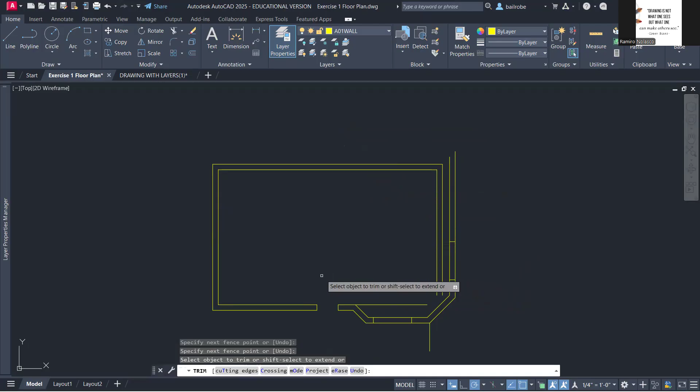But notice that this line is a continuous line, right? So maybe I'll just trim this so it doesn't offset twice. I'm going to delete that. And likewise here, I'd like to trim this because this is not the actual location of the wall.

That has been offset. I'm going to rely on this wall right here. In fact, I'm going to delete that. I'm just creating half, so I don't also need this. That was done, or there was an offset because of the continuous line made by the rectangle.

So now that I have trimmed those, I do know that this is the endpoint of my exterior wall, that's this corner right here. Even if I deleted the line, I still have that point right there, so I'm still good with that endpoint.

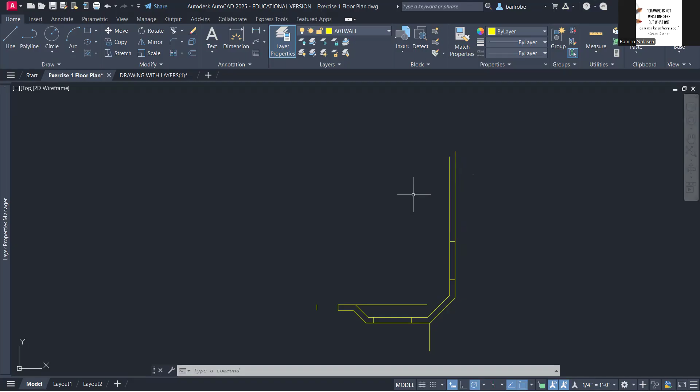Okay, next I'm going to do an offset, 13 feet and 3/4. So how do I do 3/4? Let's try this, 3-4. So I don't have a whole number. Can I just place 3/4? Yep, it did accept it. So that's 13 feet 3/4.

So I'm going to offset that. And then the interior wall thickness, where can we find it? Right there. 4.5, so that will be typical, 4.5, similar to the 10.5 for the exterior wall. So 4.5 will be the thickness of our interior wall.

So I'm just going to hit space bar again. Again, the first space bar is to end the offset command, the second space bar is to restart the last command, the last command being offset. So it just repeats or restarts the offset command. 4 inches, and dash to separate the whole number from the fraction, so 1/2 - I don't have to place the quote mark. Okay, so I'm just going to offset this like so.

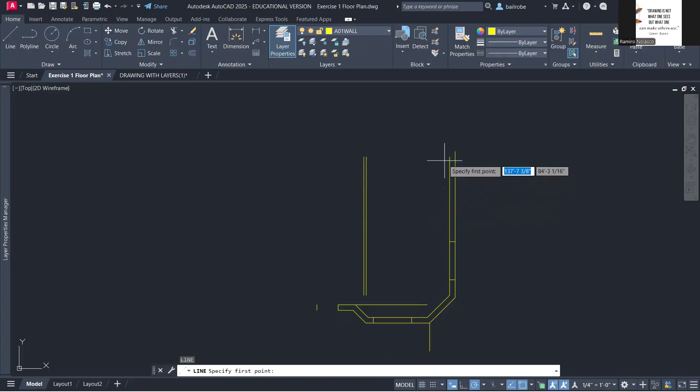And then I'm going to create a line right here, that will be the exterior wall. I don't know how far it will be, so I'm just going to draw one line right there. I can offset that, but I'll just draw another line, so that will be my new exterior wall. The reason I deleted that is because it was connected to this line and it would make an offset that I'd need to erase anyway, so no need for that.

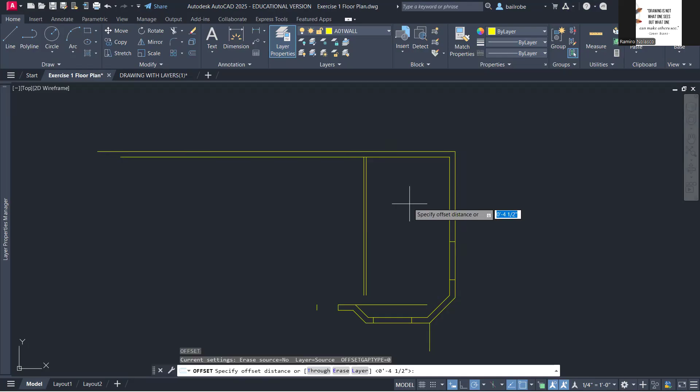Next, I'm going to offset this by 5 feet 6 inches. Okay, so offset by 5 feet 6, that's actually enough. Enter, and here you go. Now, should I do the 4.5 again? Really not, right?

I don't have to, because like I said, all I need is to make half. By doing that, I'm actually just doing half of this building.

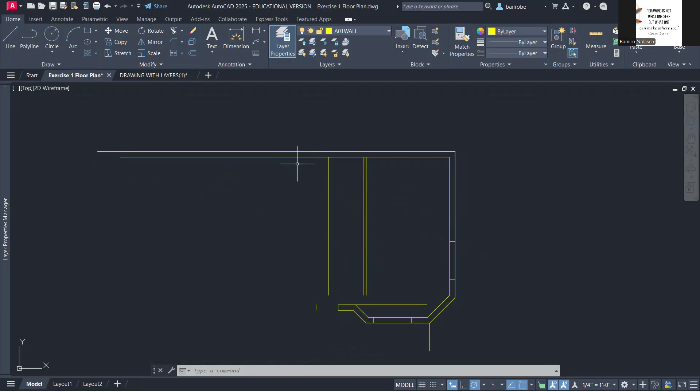So next, what do I do next? I'm going to do the distance from the interior side of this wall down, and that is 6 feet 6 inches. So from here down, that's 6 feet 6 inches. Let me do that. Offset by 6 feet 6.

Again, I do not have to place the 4 inches. So 6 feet 6 inches going down, and then offset this by 4.5. Space bar, 4-1/2, Enter.

Okay, so I'd like to clean it up a little bit, by using my friend, the trim command. So I'm just going to trim this. And then I don't want to trim this yet, so I can do that next.

And then here, for the opening of the door, we don't really know how far this is, right? So in that case, I can provide a distance. If it's not given, you can measure it from your door—how far is the door from the wall perpendicular to it? I would say about 2 inches is enough, maybe 3.

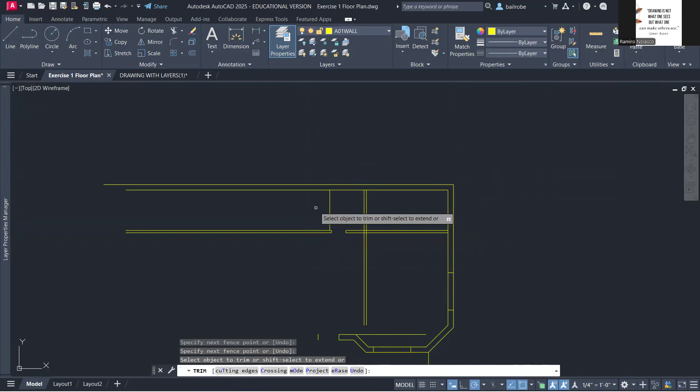So this is again, like I said, half. So I can trim this—I don't need that.

And do I do a mirror now? Not yet. Sometimes you're itching to complete the drawing, but it's best to have a strategy: complete the door first, the windows, and then the things that are symmetrical. So we have this line—if I mirror this, it will provide that line. I have this line right here—if I mirror that, I'll have that line.

But if I place the door and the windows, when I issue the mirror command, it will actually create these two windows immediately. So why mirror it now? Work on the window and doors first—that's what we're going to do next. So we're here, I can do the wall here, but I'm more interested in doing the windows first.

Okay, so I'm going to trim this, trim that, to show me the openings for the window. And for the window, hit escape to cancel that trim command.

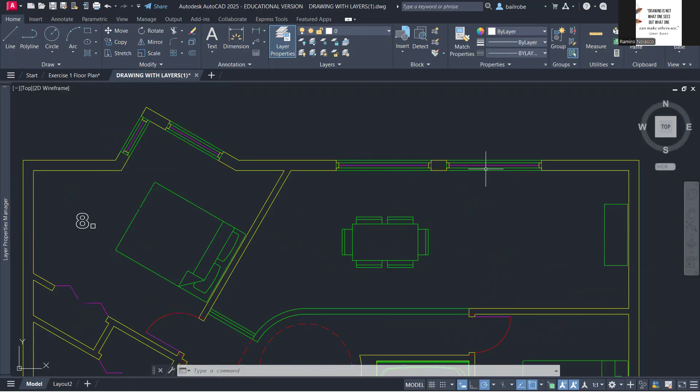I can open the drawing with layers. This is actually an imperial drawing, right? So this is an imperial drawing. I can recycle—whatever you have from your previous classes or previous drawings, you can use.

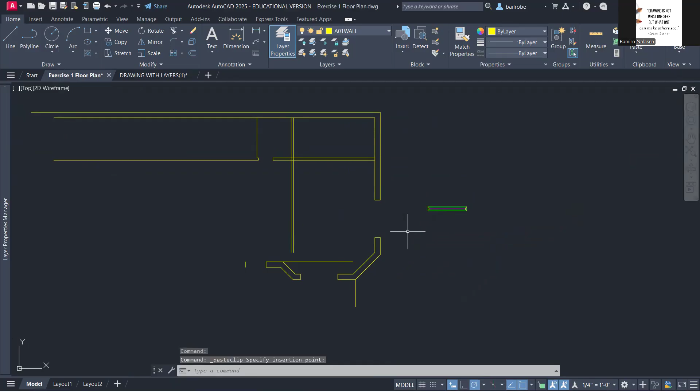So I can copy this, Control C, select and copy, and I can bring that in here. So bring that in here, and the opening is at 6 feet. So I need to...

resize this. Now if you have a block, the size of which is—let's say, let's look at the size of this wall. So this wall is only 8 inches. Ours is 10 and a half. So we're missing an inch and a half, 2 inches and a half.

So we have to resolve that. Likewise, this here is 6 feet 2 inches, so we're over by 2 inches. Okay, so we have to resolve that as well.

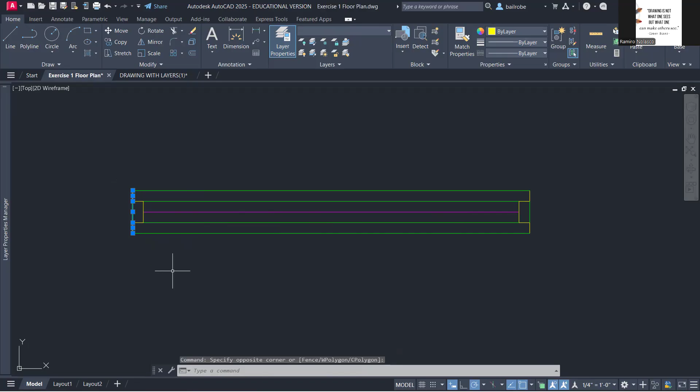No problem, so all we need to do is, number one, I'd like to clean this up. So I'd like to delete these lines—erase or hit the delete key. The reason is I already have a line there, and that belongs to the wall. Whichever is thicker, that line should be the one you use. So this one is the wall line—that's where the window will be placed. So I'm just going to use that.

Likewise, okay, I can delete this as well. Okay, so we're good so far in terms of the lines at both ends. Next, I'm going to use a line—I'll create a line and offset that by 6 feet.

Okay, so 6 feet is somewhere here, right? That means I'm over by 2 inches. So I'm going to make this shorter by using the stretch command.

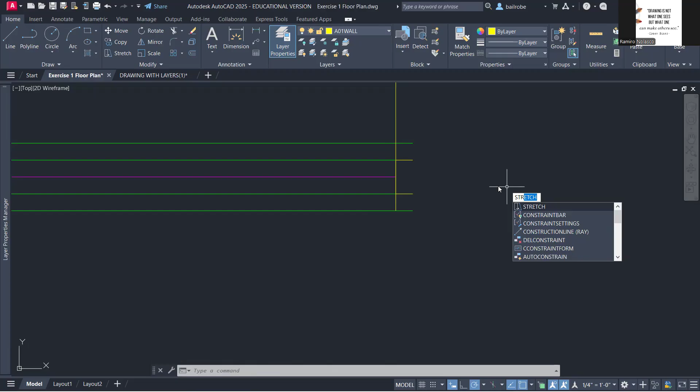The way the stretch command works is you create a window, a crossing window. So you should see the green. Anything that it crosses, it will stretch.

So I'm going to click here and stretch it from here to here. Notice that it is also stretching the line that we created, but that's okay. I can stretch it to here. That point is still present and I can simply delete this.

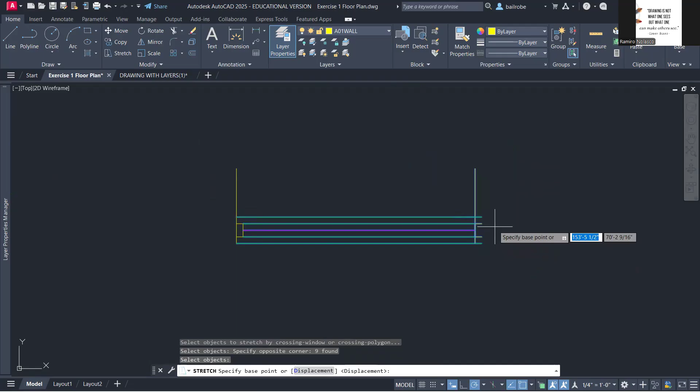Now one way of doing it is let's undo the stretch. I can stretch including this line, so that it will be within the green box. Because it is within the green box, it will simply move. I still have that intersection, so I can click there and then delete these 2 lines.

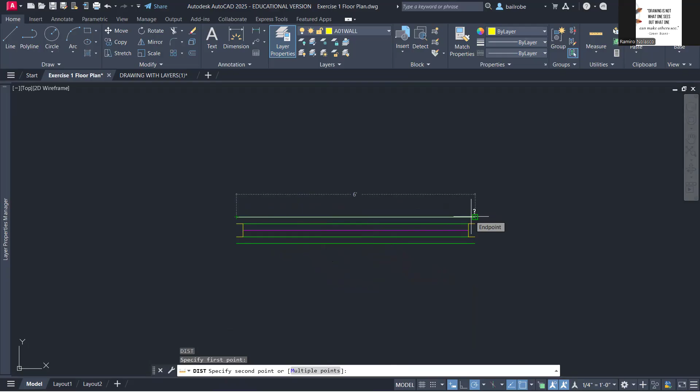You always want to verify at the beginning. This should now be 6 feet, so perfect. Now, I don't have the lines here, but that's okay.

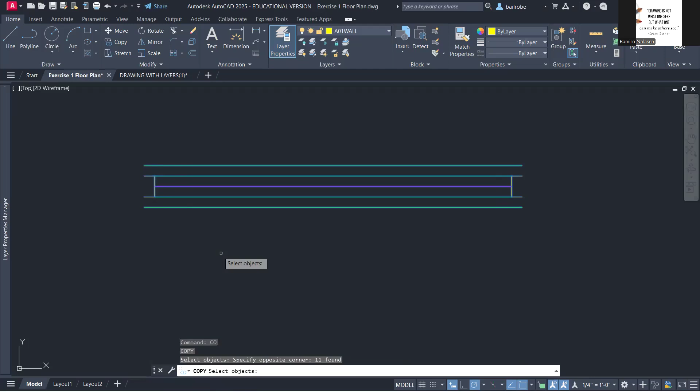I do need this to be rotated. So what I can do is copy this and rotate. Copy first, copy this from here to maybe here, just beside that, then rotate all of this here to 90 degrees. Okay, next.

Next, I want this to be placed from the midpoint of this. There's no line there, from the midpoint to the midpoint of this line right here. So what I'm going to do is I'm going to say...

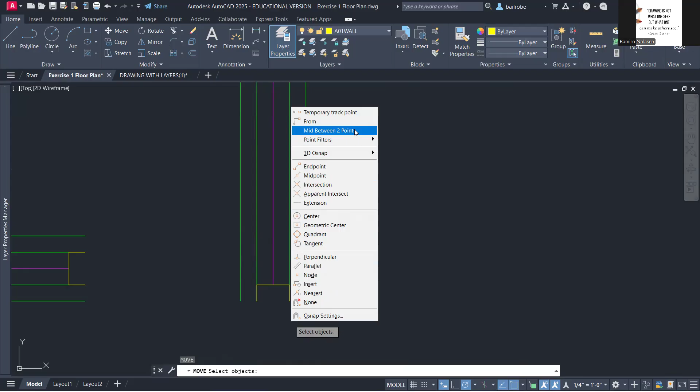Move, move, and then shift right-click, mid between 2 points. So I want the base point of my move to be the middle of the two points, mid between 2 points. So first mid, I think I'm still in select object.

Let's do that again. Move. Okay, let me move this and then enter. Okay, now that I'm in, it's asking for the base point.

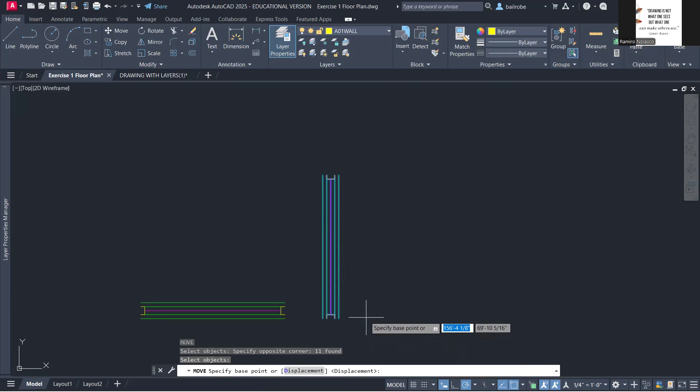I'll do a shift, right-click, mid between 2 points. The 2 points that I want will be this endpoint here and that endpoint there. That gives me the middle of those 2 points as my base point. And then I'm going to move it here at the base point.

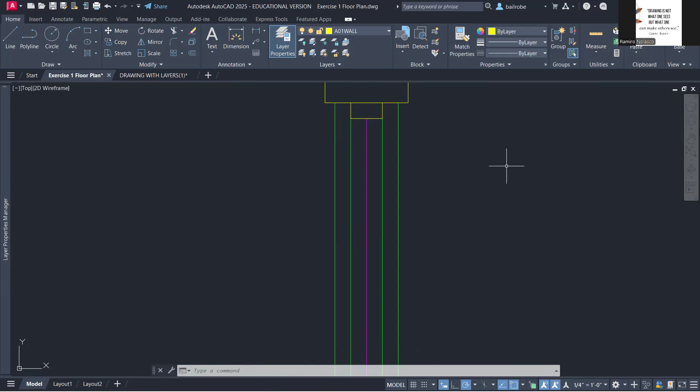There you go. Now, I could leave it like that, 8 inches, or I can also move this to the end, depends on the design. I'm happy with that, but if we simply move this, that might be similar to how our drawing looks like.

So all I need to do is move those two. Now I can move this to here, but which is easier, to copy and then rotate this and move, so you don't have to do the move, or simply move this and then move the green lines.

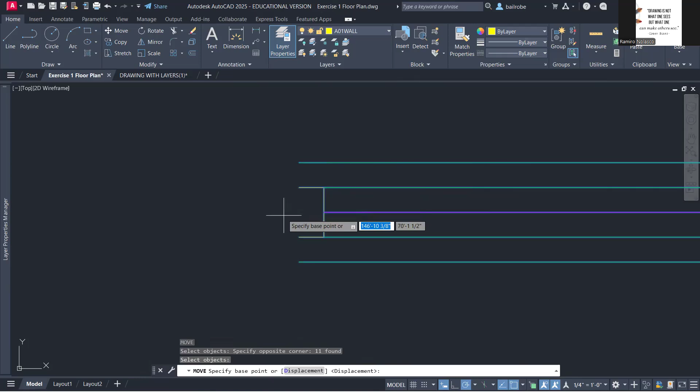I think that's easier, so I'm just going to move this. Again, decide which one is easier. Base point, again, shift, right-click, select mid between 2 points, select those 2 points.

It attaches to the middle of those 2 points, and then mid of this line. Notice if I'm going to redo all of this here, it will take you a while. So simply complete as much as you can, and then you can mirror.

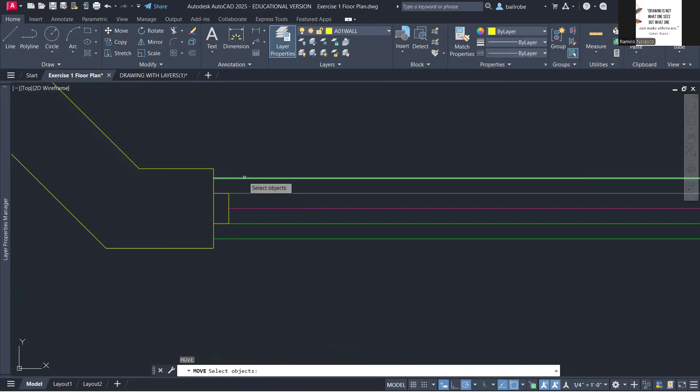So hold your horses and complete this one side first. Okay, so move, space bar, and move. Okay.

Next, I want to do the door. And if I go here, is there a door I can copy? Well, they do have a door right here. It's a simple door, but I guess I can just simply make the door from scratch.

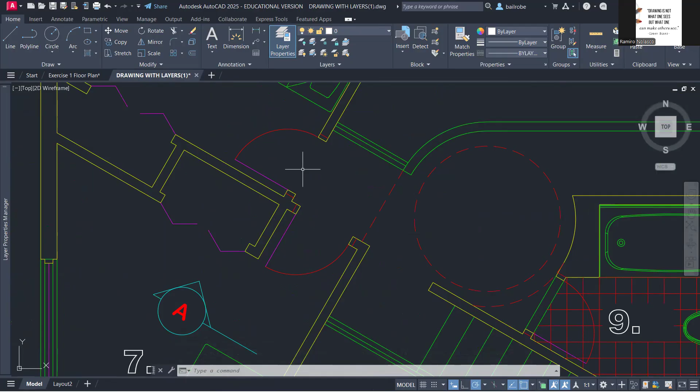I can copy that, but these doors are, well, I can rotate them. I guess, what's the distance? This is 2 feet 4 inches. Our door is 3 feet 4 inches, but we can use this door for the interior. It's the same, so let's reuse this.

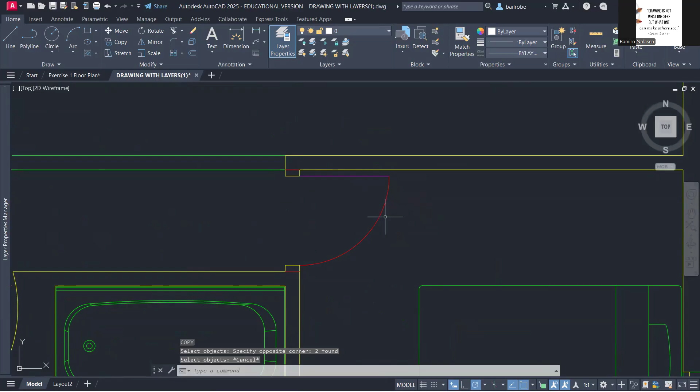Okay, so copy. Select first and then copy. Control C and then put it here. Control V. Okay, there you go. So I can use this.

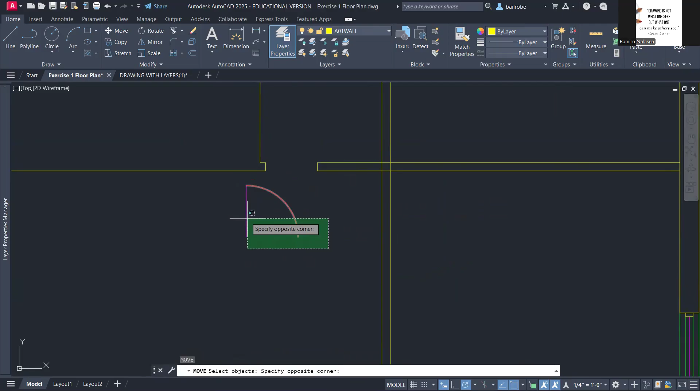Rotate this like so, and then move this from here to there. Okay. Now, in our drawing, it gives us a double door.

I actually don't like double doors like that, double lines showing the panel. Line thickness, like magenta, is good. And then this one here is red, so it's lighter.

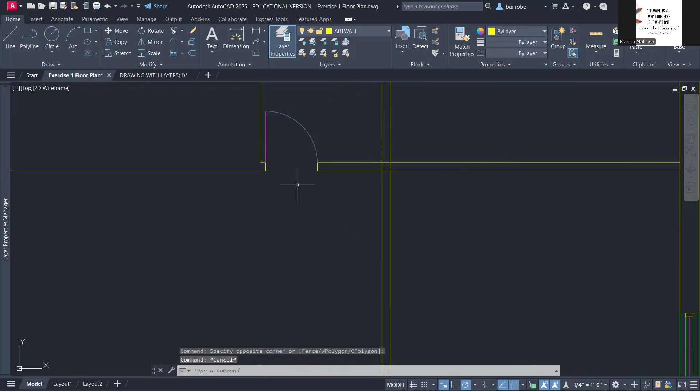But in most cases, I actually prefer this to be gray, much thinner. So red or gray should be good. Magenta for the door is also okay.

So can we use that here? Well, that's 3 feet, so maybe not. So I'm just going to go to the door layer and...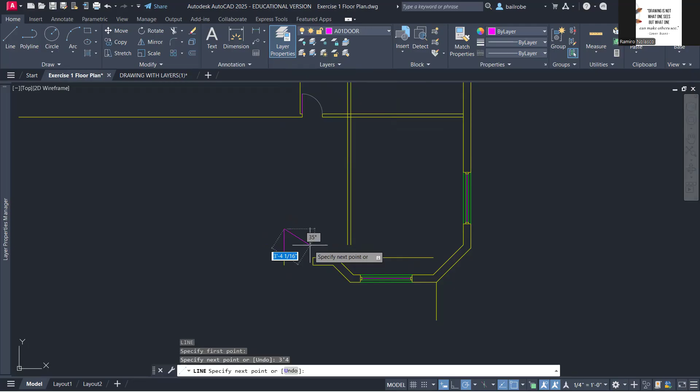create a line that is 3 feet 4 inches long. Okay, there you go. So it's a bigger door.

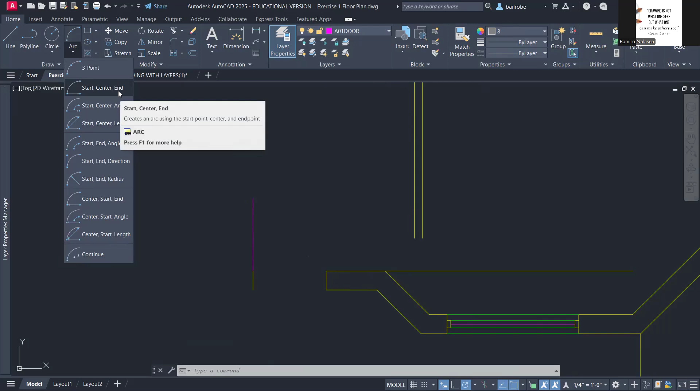Next, I'm going to draw the arc, and I'm going to change this to gray. It's still in the door layer, and I'm going to use this here, the start, center, end. Now, arcs go counterclockwise, okay, so that's the case.

It's asking for the start point, so counterclockwise is going this way. I'll click this as my start point. Okay, this as my center. And there you go, see, it goes counterclockwise.

So if you go this way, it still goes counterclockwise. Make sure you don't click this as your start, otherwise your arc will go this way.

You can also create a circle with the radius of 3 feet 4 inches, and then do a trim. But this is how you do the arc command. Okay, so end that there.

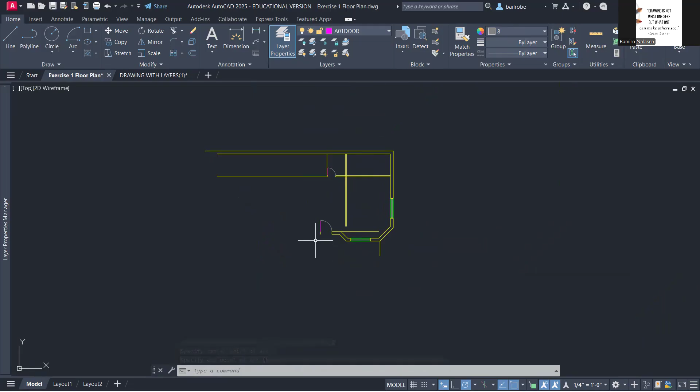Okay, so next, do I trim this? I think I should. I'm going to trim this, and I'll trim this as well to clean it up a little bit. So trim that, I don't need that. And then this one here, I can trim up to here. Okay, and then I can erase this. No, I think I need that. That's okay, maybe that's all I need to do right now.

So, am I ready to mirror now? Yes, I am, right? So I'm ready to mirror.

Should I trim this? Nope. Or maybe yes, yeah, maybe just trim that. I could have maintained that, but that's okay.

And then I use the mirror command. MI is the shortcut for mirror, so you can find that here under the home tab. You'll see there, mirror, right? But like I said, it's always faster to use your shortcut key. So MI,

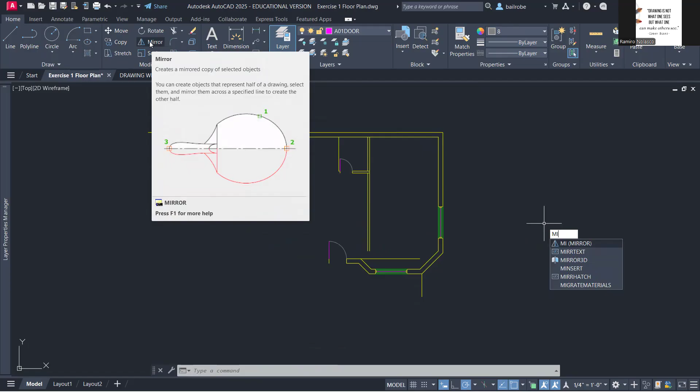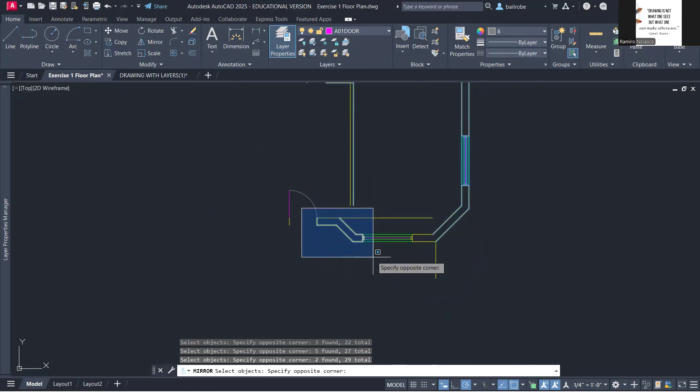Enter. And then what do I need to mirror? I need to mirror this, not those two lines. I need to mirror this. Okay, likewise, mirror this, maybe this. Okay, I don't need to mirror this. And then here, I need to mirror this. I don't need to mirror that. Actually, I don't need to mirror this, but I need to mirror this now.

Now, so if I mirror this, there'll be a duplicate. Okay, but that's okay, I'll do that.

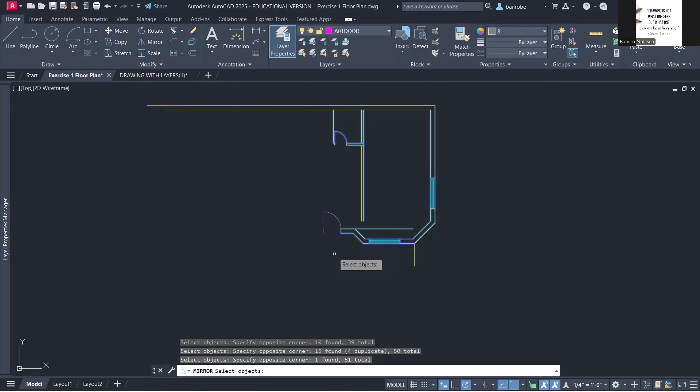Now, where will my mirror line be? My mirror line is at the middle of this door. Okay, so enter, shift right click, mid between 2 points. There you go, so that's my mirror line. And there you go.

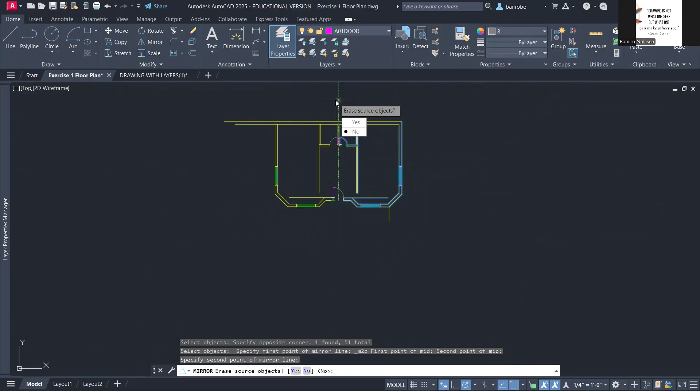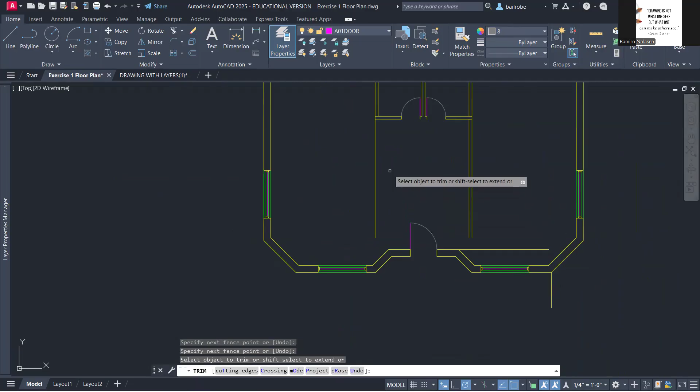Almost done with the windows and the door at the washroom. So erase source object, no. And then I can clean this up. Trim, trim that, trim this. Okay, and then I can erase this, I don't need that. And erase this, I don't need that.

And then enter or space bar. I do know that there's a duplicate here because I selected it, so I can delete the one duplicate. Always delete the duplicate, or you can also issue the overkill command. Overkill deletes overlapping lines, okay, so you can also do that.

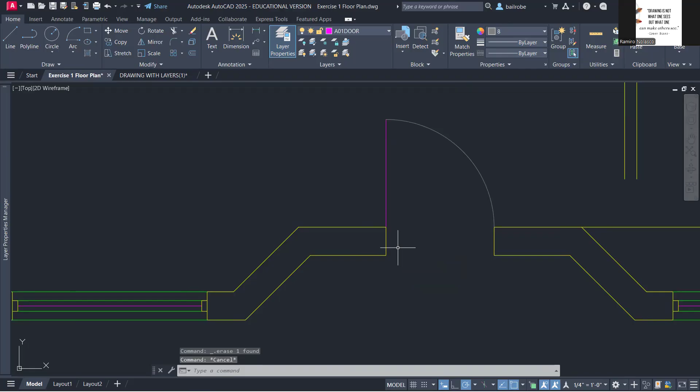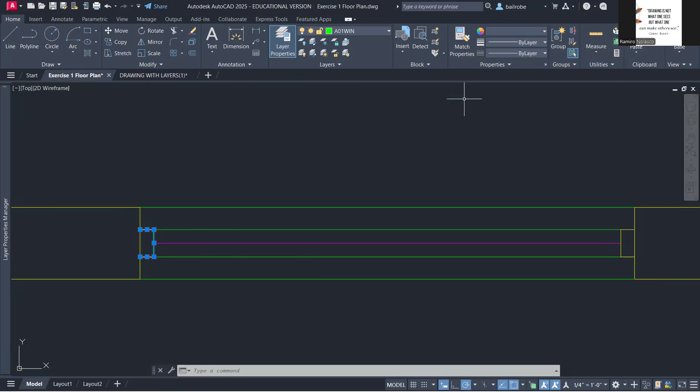So keep track of your lines. And again, by the way, windows, these are the colors, right? Green, so you had the frame at the bottom, that's green. This frame here, actually, I prefer this to be magenta. So this belongs to the window layer, A01 win. I don't know why it's not in the A01 win. So this one belongs to the A01 win layer, and it should be magenta.

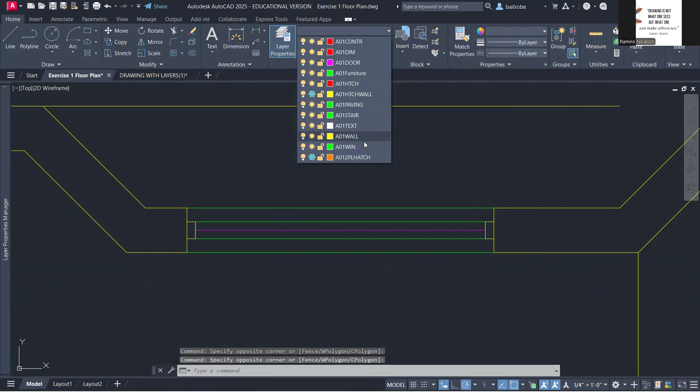I think the wall should have a thicker line. I made the mistake of not doing that earlier, so I have to pay for that by doing it manually. So again, this should be in the window layer, color magenta. Okay, so my mistake, but that's okay. See how much time I am spending because of that mistake. So efficiency, okay, this should belong to the window layer, and the color is magenta.

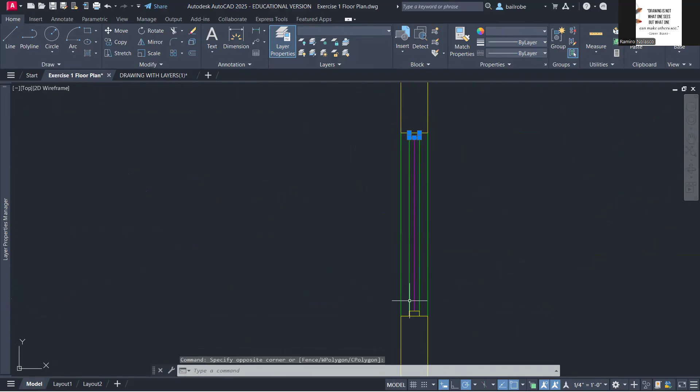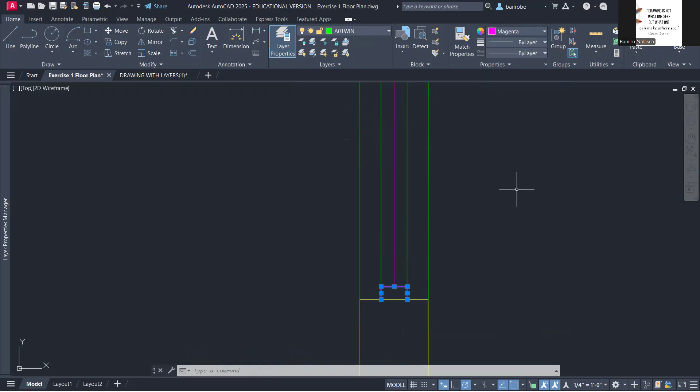And I have to do that here. Okay, so this belongs to the window with color blue. It doesn't select the lines that are crossing the box, the window, only those that are within the window. So that's a difference, there's a difference there. So window, magenta. Okay, and then

From here, I can now finish this wall. So this is 12 feet 8.5 from the outside, so be careful. Look at where it is pointing to, so from the exterior side of the exterior wall. Okay, 12 feet 8.5, so offset by 12 feet, 8 dash 1 slash 2 inches.

Okay, so right there. And then the thickness of the wall is 4.5, so offset again, or space bar, 4 dash 1/2. Okay, like so. And then, where does this end? This ends right here. From the interior face to that intersection is 9 feet 5 1/4. Okay, space bar, 9 feet 5 dash 1/4. Okay, so interior, there you go.

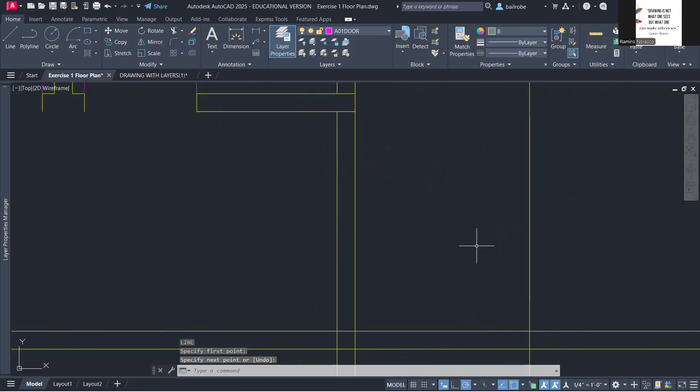Okay, line from here, 45 degrees. Enter. Now I have to change it to the wall layer by layer. I could have done that earlier, but that's okay.

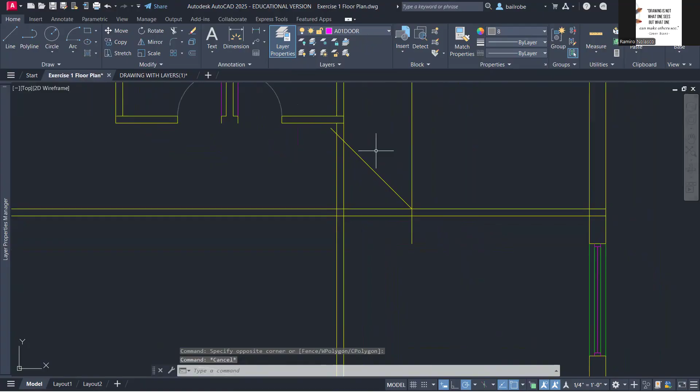And then from here, I need to offset that by 4 dash 1/2, which is the thickness of the interior wall. And then trim. Okay, so now I can trim this.

Now, if I hold down the shift key, notice instead of trimming, it extends. So by holding down the shift key, instead of trimming, it extends. There you go, nice. I can trim erase this, trim erase that, trim erase this.

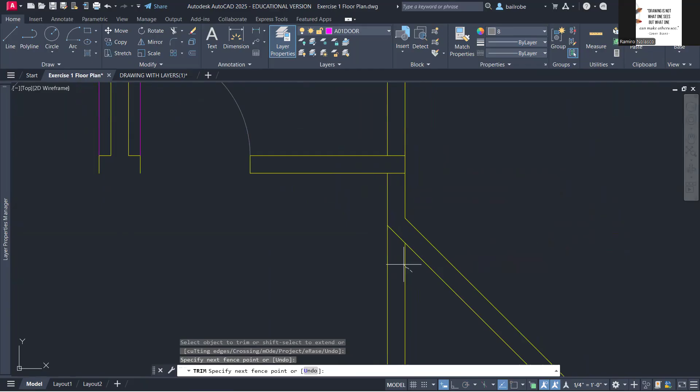And likewise here, I can trim or use the fillet command. But because I'm in the trim command already, I'm just going to use that. Trim. There you go. Then I can trim this.

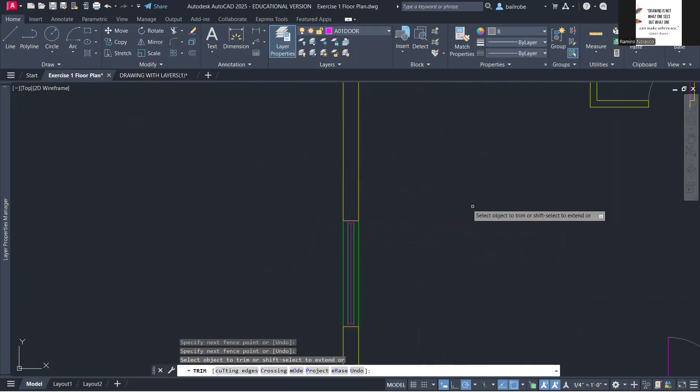Okay, clean this up a little bit, trim that, and then add that line right there. Maybe trim this first, to clean it up. Likewise, trim this, and trim that. So clean it up. Escape or space bar to end that trim command.

Go to wall by layer and then draw this line right here. We're almost there. Now we'll do the wall here.

It says this one is 10 feet, 10 1/2 away. 10, 10.5. Okay, so offset by 10 feet, 10 inches, dash 1/2. So offset this right there.

Next, this is 7, 7.5 from the interior. Okay, space bar, 7 feet, 7 dash 1/2. Enter. So this one goes here.

And this is 4 feet, after 4.5, which is the thickness of the wall. So I'll do the 4.5 first. Maybe trim this first. Trim. Okay, I'll erase that later.

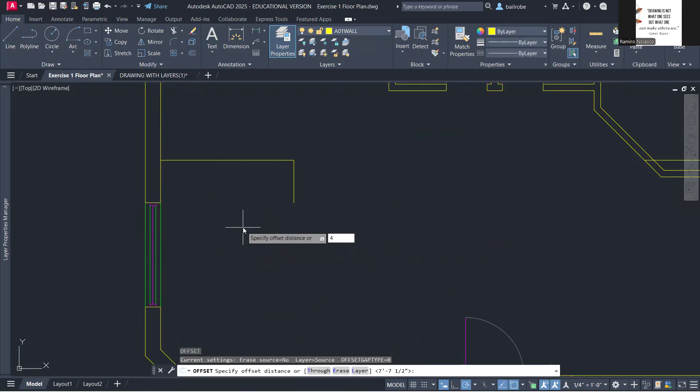And then offset this by 4 dash 1/2, which is the thickness of the interior wall. Okay, it goes down. And then this one here, 7 feet, it goes out. So this one goes out. Goes out. So you need to verify, right?

So 7 and 1/2 is to the interior face. So the 4 and 1/2 goes outside. Okay, now what do I do next?

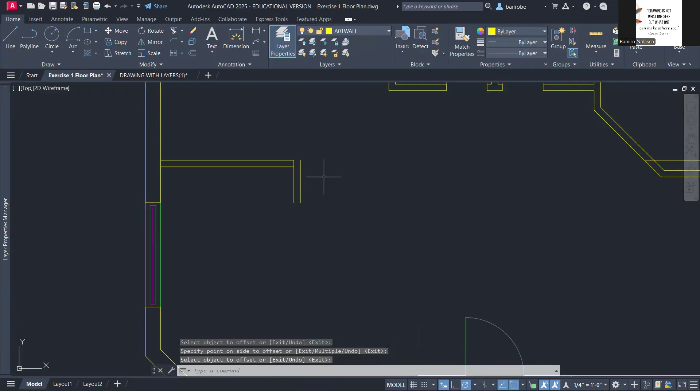I can trim, trim this, and then hold down the shift key, trim extend. Okay, and then 4 feet down, so offset by 4 feet. Make sure don't forget the apostrophe.

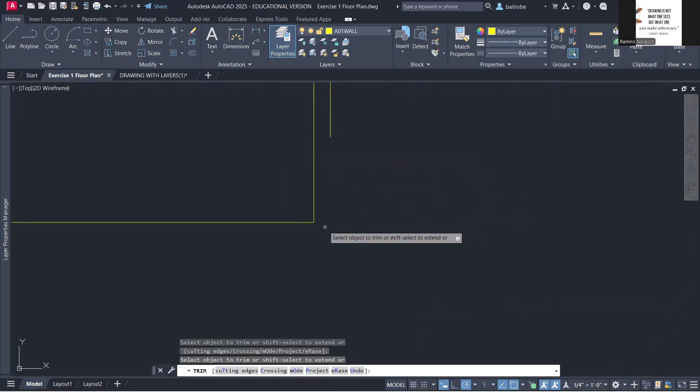Down. Okay, and then can I do a trim extend? Yes, I can do for that one, but can I do it for here? For this line, no, because it actually doesn't recognize this as a boundary.

So instead, I'm going to do the fillet command, and the radius of our fillet is 0. That's the reason why if I click these 2, it will actually connect, and then I can trim this. There you go. Then I just need to select and erase this. Delete.

What else are we missing? Ah, so we're missing the door. So we'll add the door here. We're missing a door here as well. This door is 3 feet.

This one is 3 feet 4 inches. And see, our door in the interior doesn't have the frame. So that's the reason why I didn't put the frame here anymore, to be consistent. So always be consistent in your drawing. If you add the frame here, you should add the frame there as well. Okay, so we're not adding that for now.

So let's finish the wall here first for the coat rack. This here is 2 feet 7 inches. So I'm going to say offset by 2 feet 7 inches. There you go. And then what do I do next?

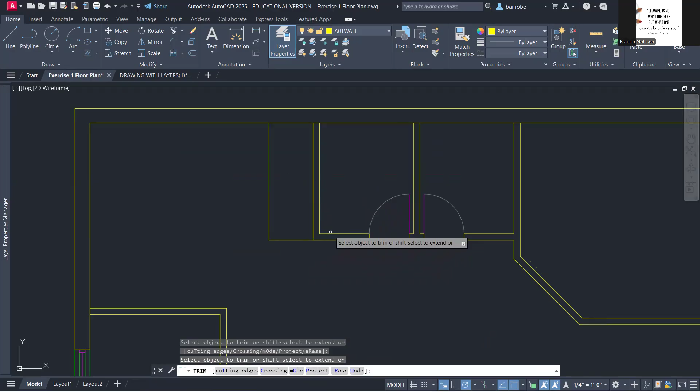I can trim, extend this. And I can trim, extend this, 1, 2. And then I can trim this. There you go. And then I can likewise trim this too.

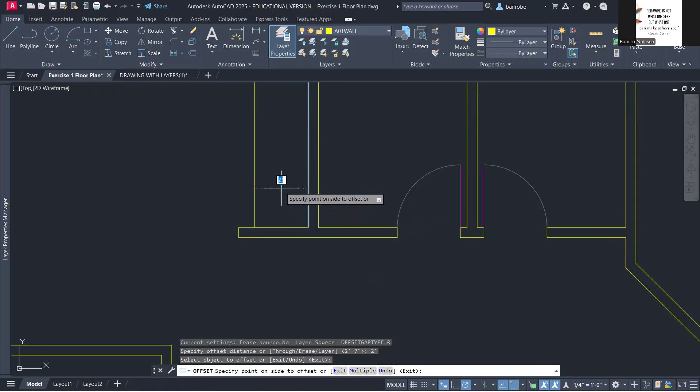And then for the coat rack, it doesn't give us a dimension, but normally this will be so 2 feet, I suppose, is okay. Or yep, 2 feet. So offset by 2 feet right there. And because this is a coat rack, the thickness, I can place it under the wall layer, but

I'll make it a little lighter, so magenta. And then there's a hidden line next to that, so I'm going to offset that by, let's just say, 2 inches.

And for this one here, the line type should be hidden line. So I'm going to go to the hidden. Now, if you don't have this, you can click on other and then load. Now, do not load the AutoCAD ISO, because this is Imperial, that's used for metric. So you can go down and load the hidden.

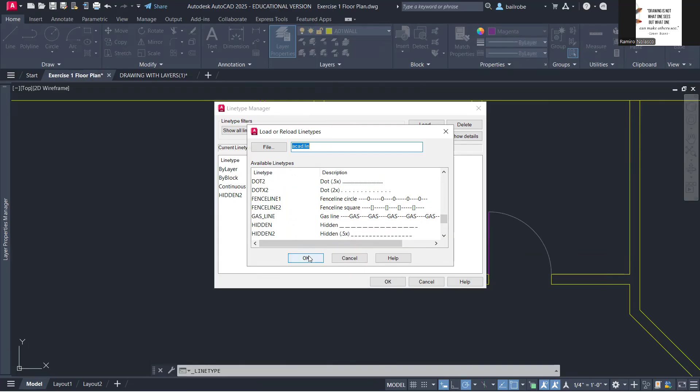So you can type H or simply drag this down. I think we have hidden 2 loaded here. So that's okay, hidden 2. Or you can select hidden, click OK. Once it gets loaded, you can select that, yeah, and set current, or you can select this, and because it has been loaded, you should be able to see that here.

Okay, so which one do you prefer? I think I prefer hidden 2. Now, and because that is a hidden line, I'll use gray for that, so lighter gray or red.

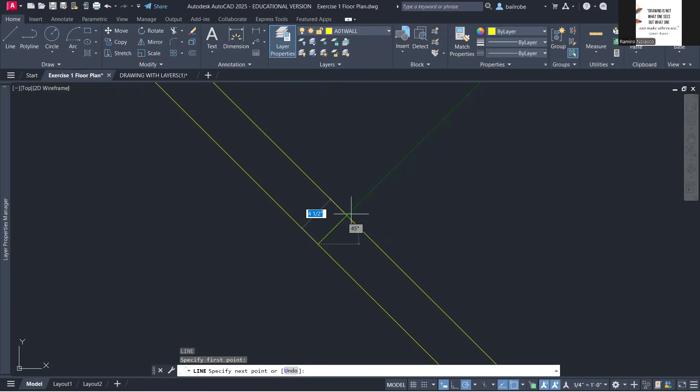Okay, next I'm going to create a line from the middle of this, and it should be at a 45-degree angle. I'm just going to make a line up to that point, and then offset this by half of 3 feet. So I can say offset by 3 feet divided by 2.

Enter. It doesn't allow that, requires 2 points. It's asking for half of 3 feet, so I'm just going to say 1.5 or 18 inches. It doesn't like my math operation, so that's okay. I'll offset by 1 foot dash 6 inches, 1 foot 6.

There you go. So 1 foot 6 here, 1 foot 6 there. Where is it? Okay, there. I hope it didn't repeat. Did it repeat here? Yes, that's where the line was going, so let me delete. See? No, okay.

And then I can trim this, trim that. Okay, I can trim that. And then draw my line. So line, I want to be in the door layer.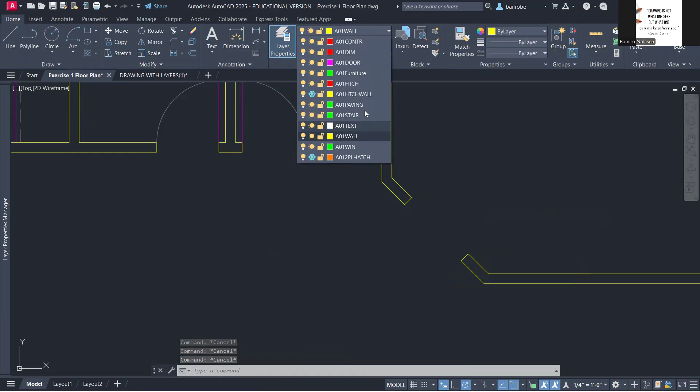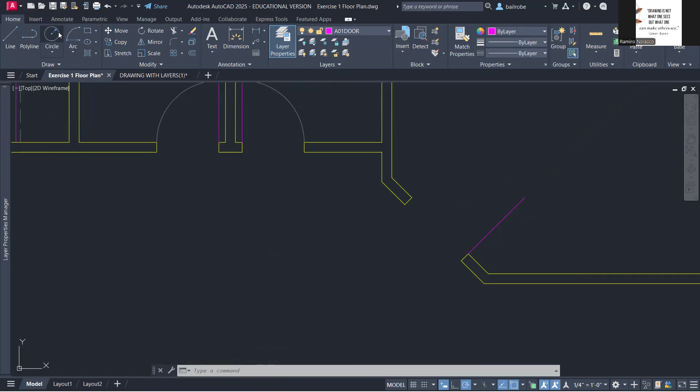Okay, by layer, line from here, 45 degrees, 3 feet. Enter. And then remember the arc goes counterclockwise, so I'm going to say arc. Start, this is my start point, this is my center, and then it goes counterclockwise.

There you go, and I'd like to change that to gray. Next, I'm just going to add again 3 inches from here, similar to what I did for this door. So that's 3 inches away. I'm just going to say offset by 3.

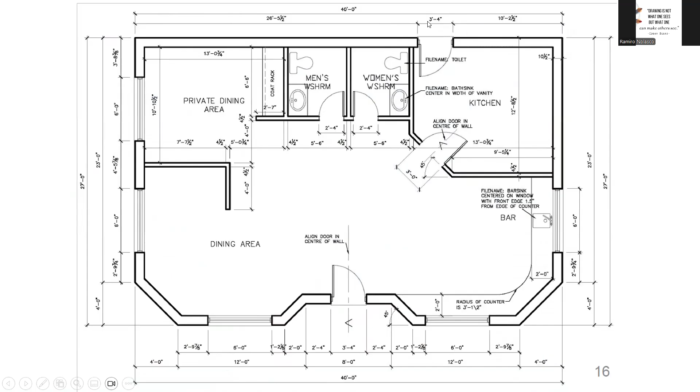There you go. I'm going to extend this to the exterior face, and then trim this, trim that, and then offset it by 3 feet 4 inches. So that's the 3 feet at 45 degrees door, and this one will be 3 feet 4 inches. So offset this by 3 feet 4 inches. Enter.

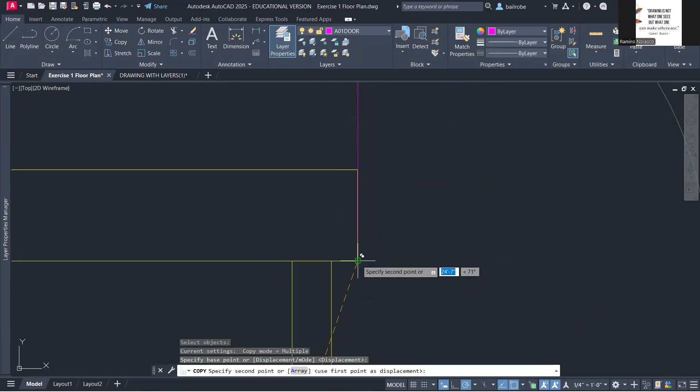Select, then trim, trim that. And then create a door from here. Actually, because I have a door here that's 3 feet 4 inches, I'm just going to copy this from here to here, and then mirror. Just going to mirror this from here to there. This time I would say delete or erase source object. Anytime you can use objects you have created before, go ahead and use it.

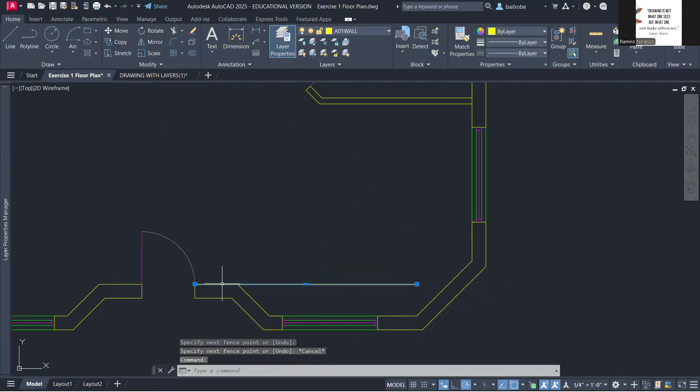Okay, now I can erase this. And this one here, should I trim this? Trim. No, I don't need to trim it. But somehow there's one line that's going over, so I'm just going to make that smaller. Just a second, is there a duplicate here? Nope, so that's okay.

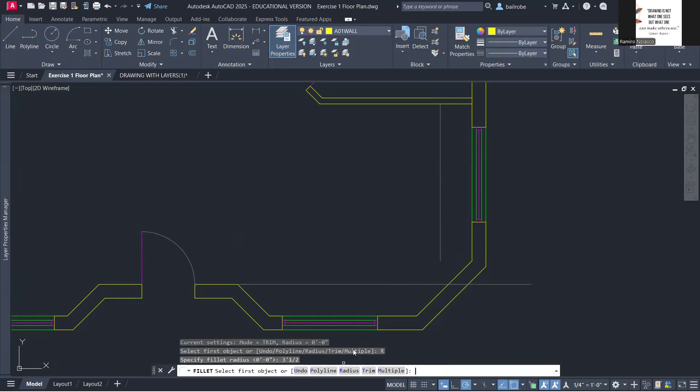Okay, and then I'm going to change this to gray, and then fillet this with a radius of 3 feet 1.5, the radius of the counter. So I'm going to say fillet this time with a radius of not 0 but 3 feet and 3 feet 1/2. Select the two and you get that filleted. Okay.

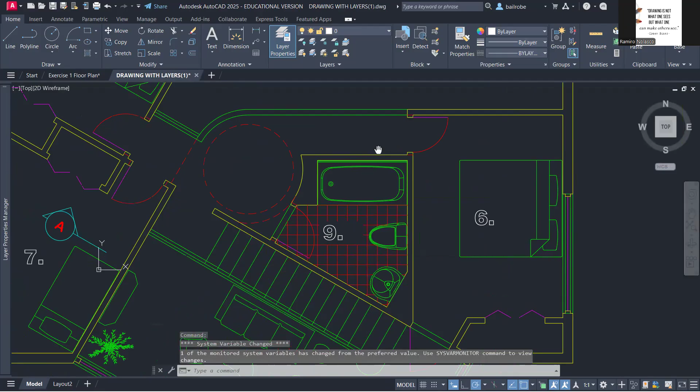Last thing we need to do is add the water closet and the sink. So let's go here, and we do have a sink right here that I can copy. So this one here and then this one here. I can Control C, copy, select, then Control C, and then Control V. Okay, so I can place this here for now. This one I need to rotate.

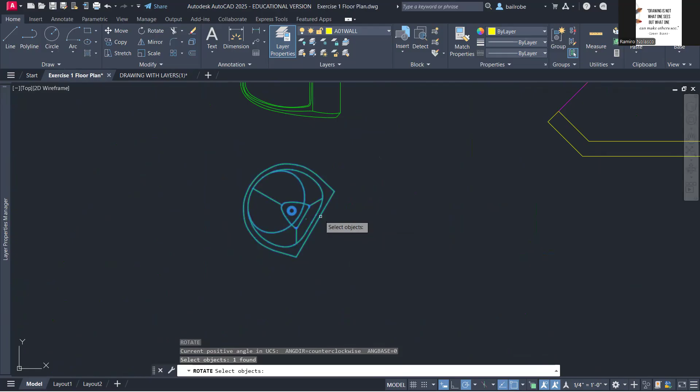So rotate this from here to... how many degrees? Okay, so I do not know. So what I'm going to do is use the reference option. The reference angle is this, and then keep it or make it straight. So reference, again rotate, select, and then there's the option base point, and then reference.

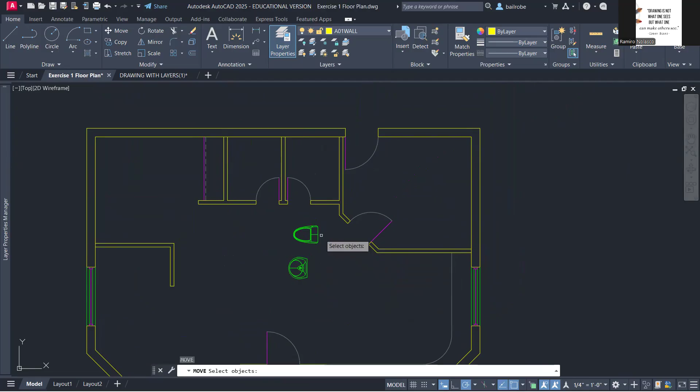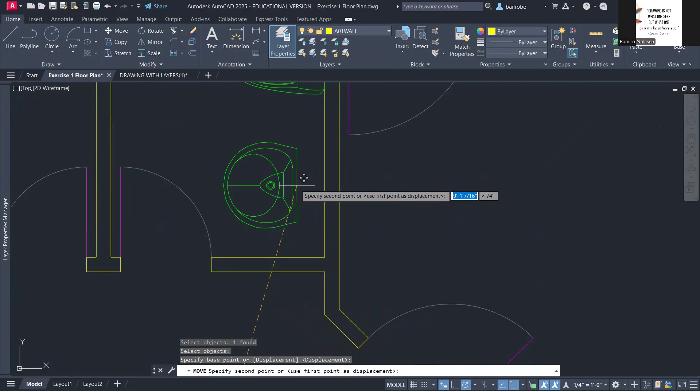Okay, now I'm just going to move. I'm going to move this from midpoint to somewhere here, so near, NEA, near, somewhere here. Okay, so near here. And then move this one here from midpoint to somewhere near, NEA, somewhere here. Okay, and then all I need to do is now mirror.

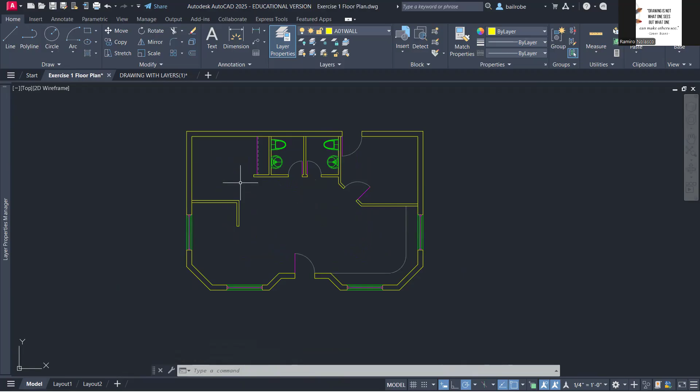So I should have done this earlier, I could have added that in the mirror operation, but that's okay. There you go, that's all we need. That's completed, that's how I would do it.

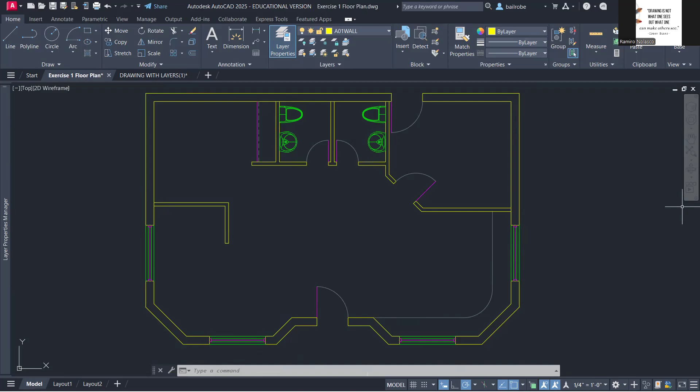There are things I could have done that could have made it more efficient, like changing the color of this frame to magenta. This one here, I could have added it first before the mirror command, so complete everything before you mirror. Okay, so that's the end of exercise 1.